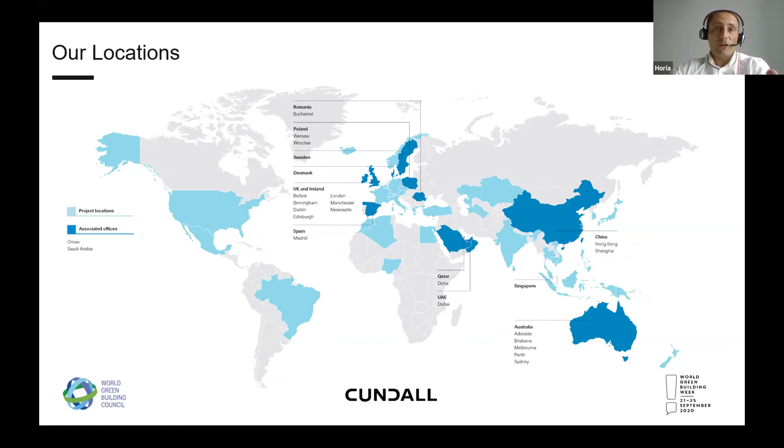We operate globally in 25 offices, so it all depends on where we are present. Some markets are more mature than others in terms of net zero carbon, and people are more educated in that respect. Now, net zero carbon for new buildings is the easiest thing to do, but we really need to be concentrating our efforts on reducing the carbon footprint of the existing buildings, which is at this point probably 90% of the stock of our clients. How we drive them to net zero carbon is a real challenge for developers and occupiers as well.

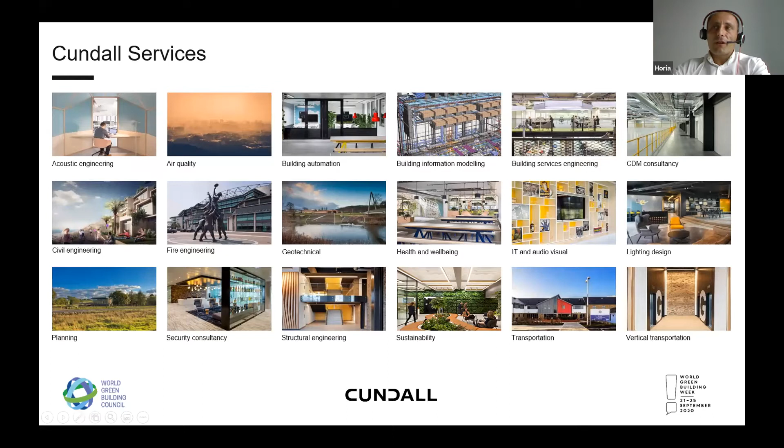As I was mentioning before, the key problem is the building stock of our clients, which will be the main focus right now. How can we get the best of what we already have? In our opinion, it's better to repurpose those buildings instead of knocking them down and building something from scratch. So the emphasis now is how to drive the existing buildings to a net zero carbon stage. My colleague Simon will touch on this issue a bit later in the presentation.

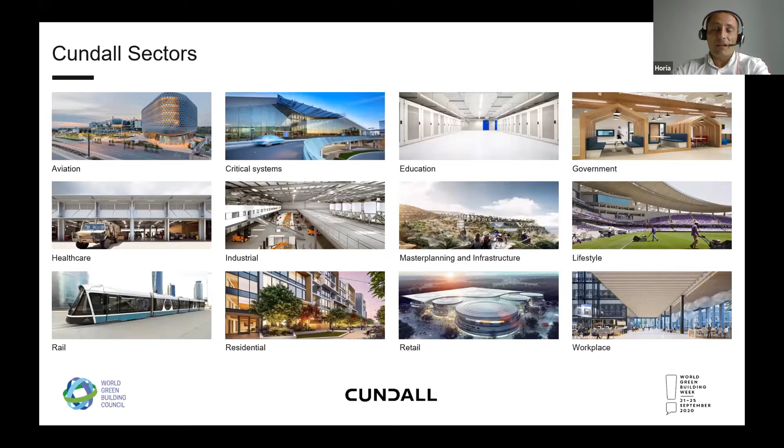Climate emergency. Climate emergency requires action across all sectors, and we are increasingly finding opportunities to reduce the carbon footprint in all our sectors. There are more and more clients that are pushing for net zero carbon now across the globe.

As a global community, we currently consume 1.7 planets worth of resources to sustain our daily demands. Earth Overshoot Day is the day we stop using our fair share of resources and we are starting to borrow from the next generations. This year, for the first time, this day actually moved in the right direction, but this was mainly due to the pandemic and because the entire world stopped for a few months in April or May.

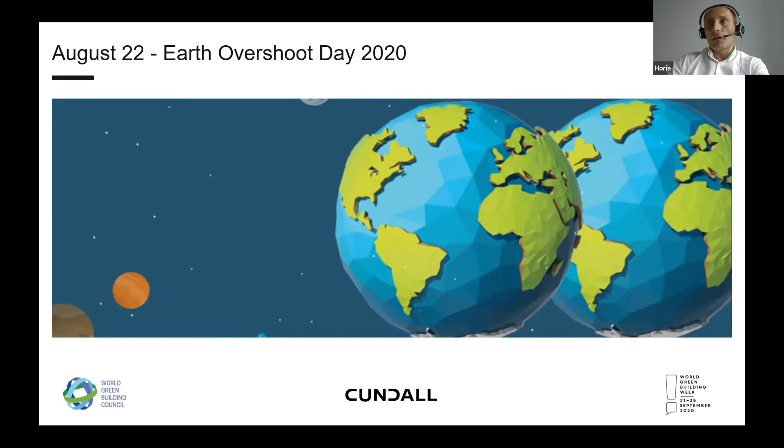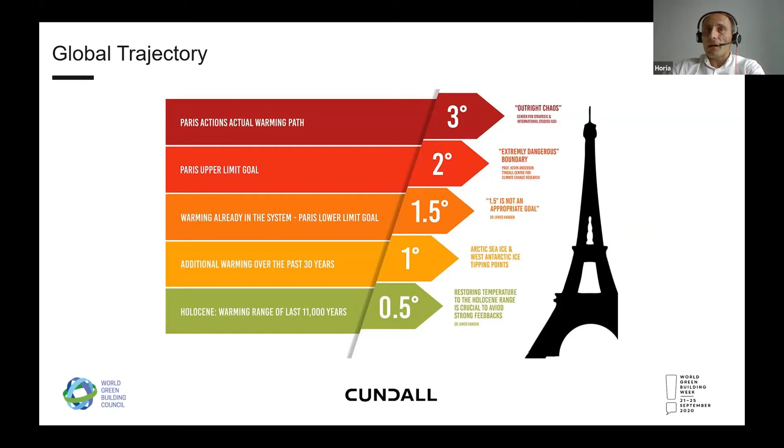Key to this is reporting and reducing our carbon emissions to help reduce our impact on global climate change. Just as a reminder, we are already on a trajectory of at least 3 degrees global temperature rise, which will have profound impacts on us all, and it's well above the target set in the Paris Agreement, which was 1.5 degrees. It is vital that we act now and we act together to achieve this goal of flattening the emissions curve.

Achieving the net zero carbon target must be at the heart of our industry and a response to this crisis. As you've seen, I think it's in the past 5 or 6 years that these things have started to happen. The impact of climate change is affecting us all. There are bushfires and the wildfires in California, in Australia. We've seen huge floods in the UK, I think it was in February this year. So we need to act as quick as we can, and we need to act together.

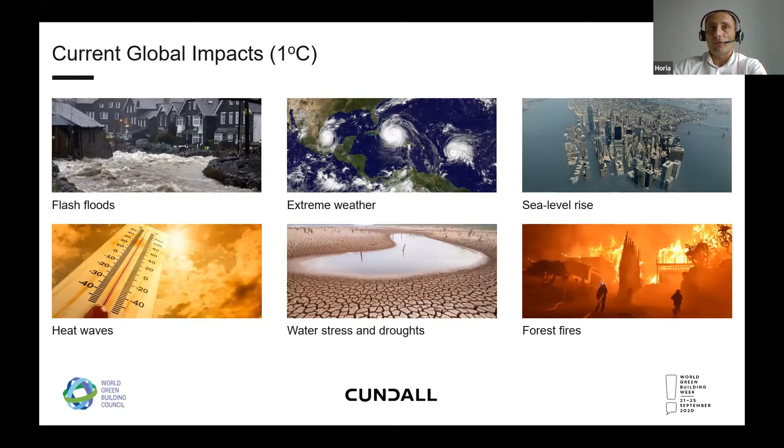In response to this, the EU Parliament have declared a climate emergency and set a target to limit global temperatures to 1.5 degrees in line with the low threshold of the Paris Agreement. To achieve this, they have set challenging targets to reduce carbon emissions by 55% by 2030 and to be a carbon neutral continent by 2050.

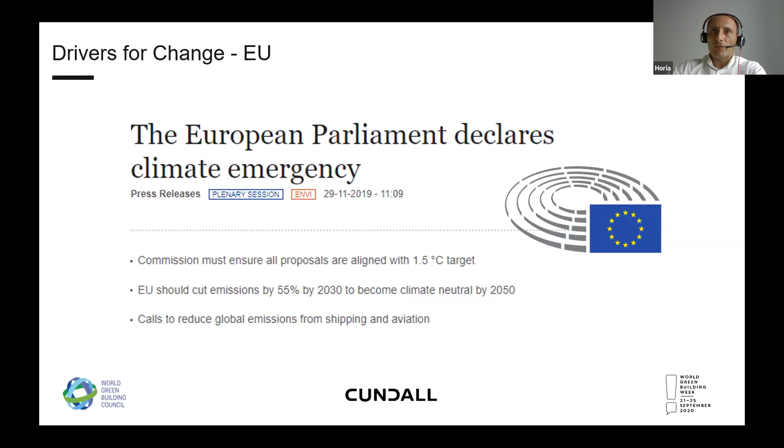Also, the Romanian Parliament in November last year declared a climate change emergency, but they haven't set the scene yet on how we're going to do this in Romania. We're still waiting for measures to be out there so we can implement them in our design and in our lives in general.

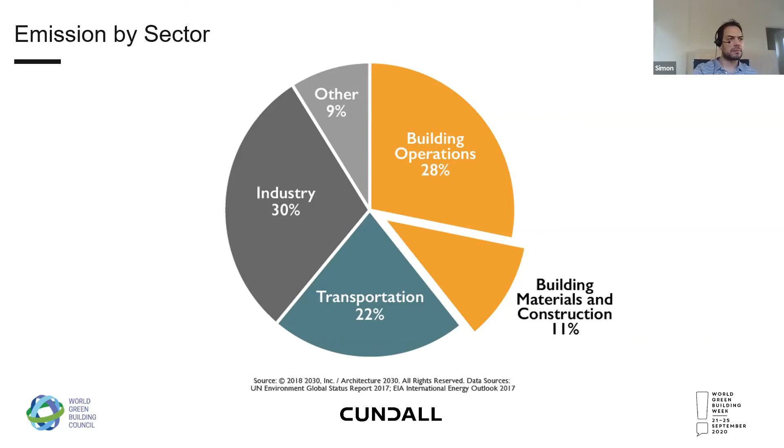To help this, the World Green Building Council, working with all of the local green building councils, have set some challenging targets around buildings. They've set a target that all new buildings are net zero carbon in operation by 2030, all existing buildings by 2050, and all new buildings by 2050 considering whole life carbon, so that's including the embodied carbon associated with their construction. To help people understand what this means, they've helped publish a number of documents which support this. We helped put a number of those together, explaining what upfront embodied carbon is, how to move towards a net zero carbon economy, and how to design these types of buildings.

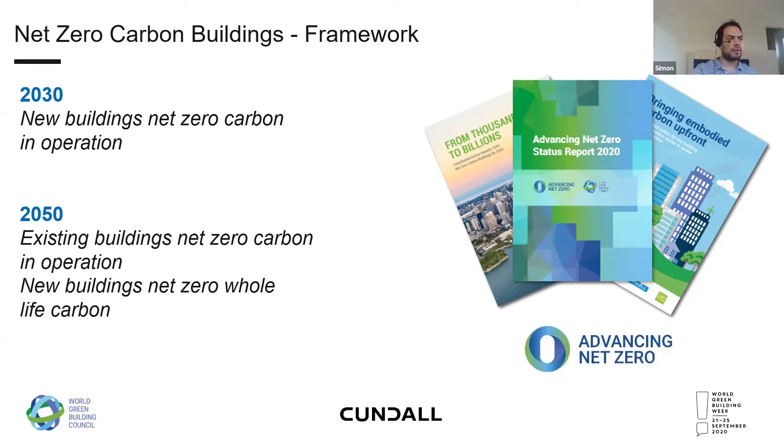One of the most advanced GBCs is the UK GBC, who have put together a framework for what net zero carbon in the built environment actually looks like, and that is now being adopted by a number of other green building councils around the world. And this is it here, which is basically saying that in order to be a net zero carbon building, you need to reduce your construction impact, reduce your operational energy use, provide renewables on site where possible, and if not, purchase green electricity. And then finally, once you've got as low a carbon building as possible, offset any remaining carbon using grade A certified carbon offsets.

The final part of the process is public disclosure, so that the process is transparent, so that people can see what other people are doing and make sure that there isn't greenwashing and people aren't just offsetting energy intensive buildings. This framework applies both to new buildings in design and also buildings in operation. And what's really important with this is the first two, which is reducing construction impact and the operational energy.

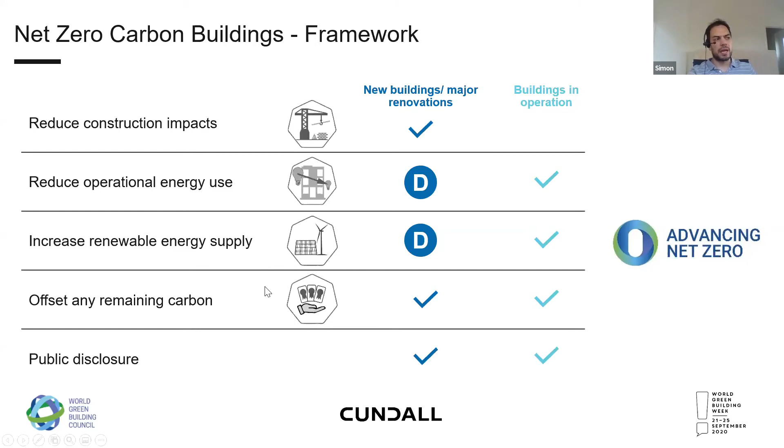And what is happening around the world is people are actually setting intensity targets. So these are minimum performance requirements for the construction, kilograms of CO2, and the operational energy, kilowatt hours per meter squared usage, before a building is allowed to do the renewables and carbon offset if they want to claim to be net zero carbon. So the question is, how do you set an operational energy target?

Well, the way it's being done around the world at the moment by green building councils is using a method called the Paris Proof. And that's basically saying, how do we transition to a net zero carbon economy? And when you have a net zero carbon economy, it basically means that all your energy demands are going to be met by renewable sources and there's zero carbon emissions.

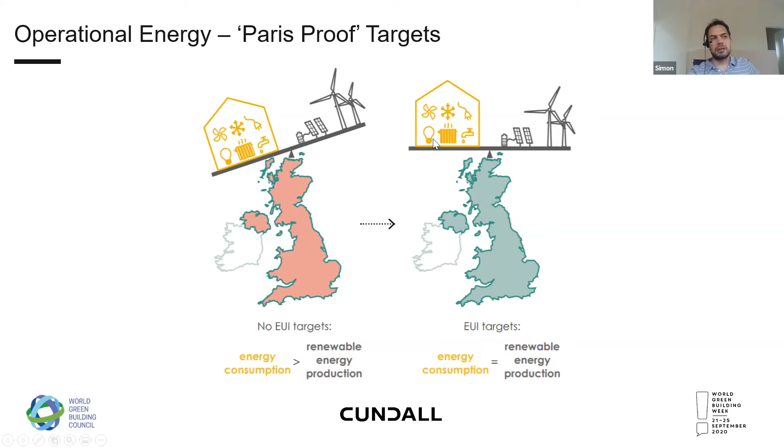If we take the UK, for example, at the moment we produce about 20% of our electricity from renewables, and therefore we have a huge imbalance compared to our demand. In order to move to a net zero carbon economy, we must reduce the energy consumption that we need, whilst providing more from renewables until they reach a balance.

So if we took a snapshot of that at the moment, currently this is electrical generation from renewables, which is about 20% in the UK, and here's demand, which is very high. In order to transition to a net zero carbon economy, we must reduce this demand while simultaneously increasing renewables. And once the two meet, then we move to a net zero carbon economy in terms of energy.

What that means for the industry is that basically, if all industries decarbonise at the same rate, it's about a 50 to 60% reduction in energy demand in all sectors. Obviously, all sectors won't be able to reduce at the same rate, and as we move towards more electric vehicles, that will put increasing demand on the electrical infrastructure.

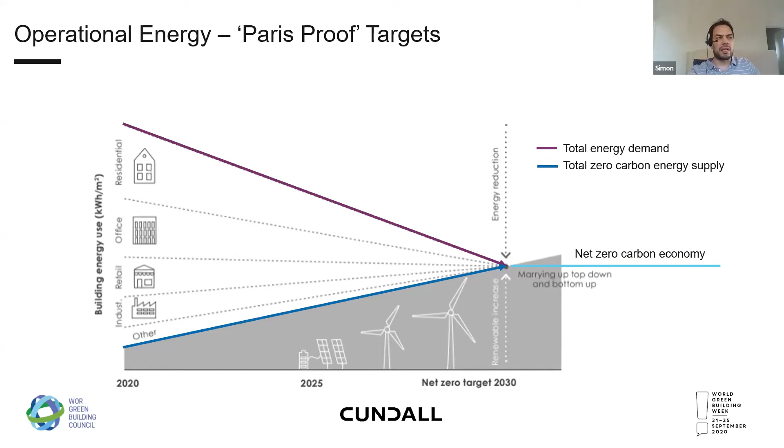So buildings, in order to meet a net zero carbon intensity target, really have to get kind of a 60 to 70% reduction from what is typical now. So if you take a typical average performing building in Romania and want to make it net zero carbon, the first thing to do is reduce energy consumption by 60% as a minimum. That is known as a top-down approach, which is basically saying what is every building's fair share.

And once they apply all of the energy efficiency measures, the lowest they're predicting we can get to for commercial offices is around 55 kilowatt hours per meter squared. So you can see it's a significant reduction from where current building stocks are at the moment, and is really challenging. And this is very closely aligned with the top-down approach, which is that 60–70% reduction.

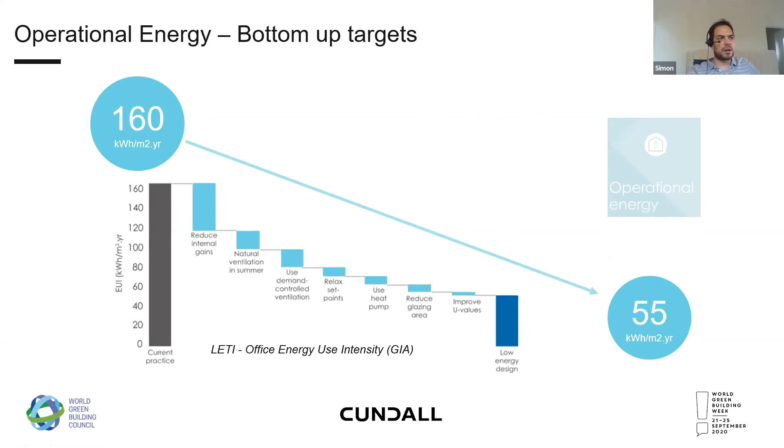So once we have operational energy intensity targets, the next focus will be on embodied carbon. So this graph is basically showing operational energy in dark blue, and at the moment it's the majority of a building's emissions. But as we reduce the operational energy over time, the embodied carbon associated with its construction becomes more important, and we need to start focusing there.

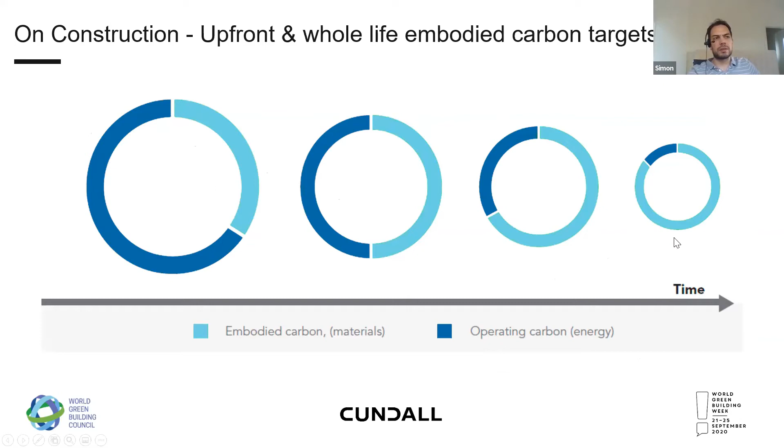When we talk about embodied carbon, what do we actually mean? Well, there's actually lots of stages of embodied carbon, and the main two are known as upfront embodied carbon and then in-use embodied carbon. So upfront embodied carbon is the energy associated with the extraction of materials, the processing, and their transportation to site, including the site activities, so all the cranes, plant that help produce the building.

When the building is built and completed, that is the entirety of the upfront embodied carbon, and that can actually accurately be calculated and reported on that completion process. Once the building is in use, the in-use phase kicks in, and that includes things like maintenance, repair, fit out, recladding, or any works done to the building during its 50, 60, 100-year life.

And then we also have to account for the end of the life. So when the building is demolished, what happens to the materials? Are they sent to landfill? Are they reprocessed for recycling? Or can they be reused, helping a circular economy? So all of that is whole life carbon, and has to be accounted for when considering the design of the building.

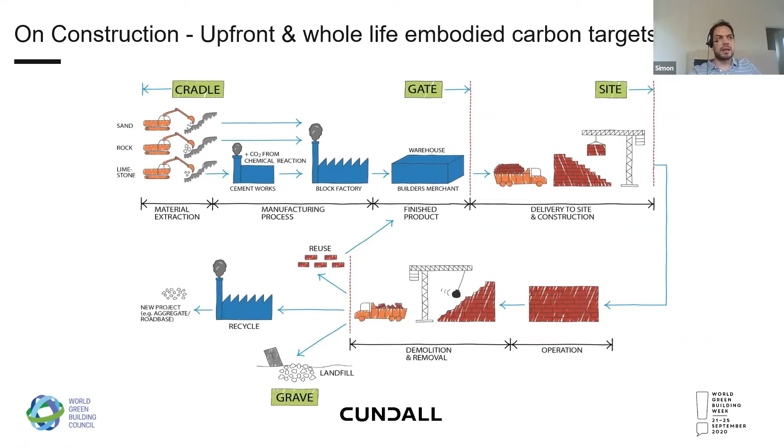Similarly to operational energy intensities, the entire world is looking at embodied carbon intensities. Cundall recently worked with the Greater London Authority to help them set their methodology and targets for new buildings in London. And we did a review of about 50 buildings which had recently been built, and they were averaging an embodied carbon intensity of just over 1,000 kilograms of CO2 per meter squared.

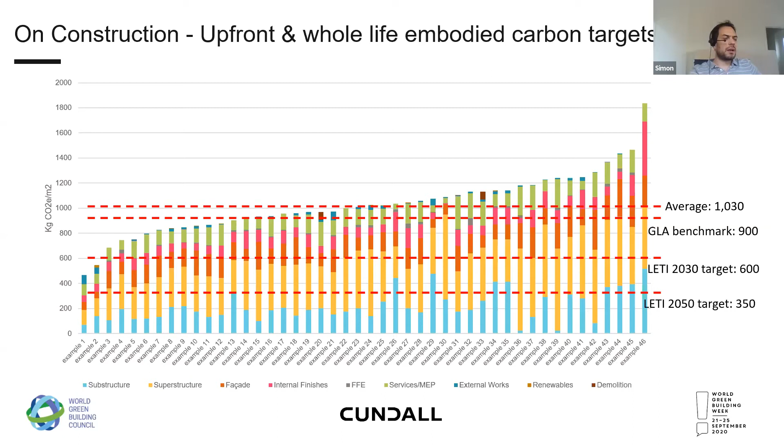Again, what you'll see around the world over the last 6 months is people setting these intensity targets. And what a lot of people have done is, instead of just jumping straight to an end target, they've kind of done a stepped approach. So setting targets for 2020, 2025, 2030 for new buildings, and then existing buildings at 2050.

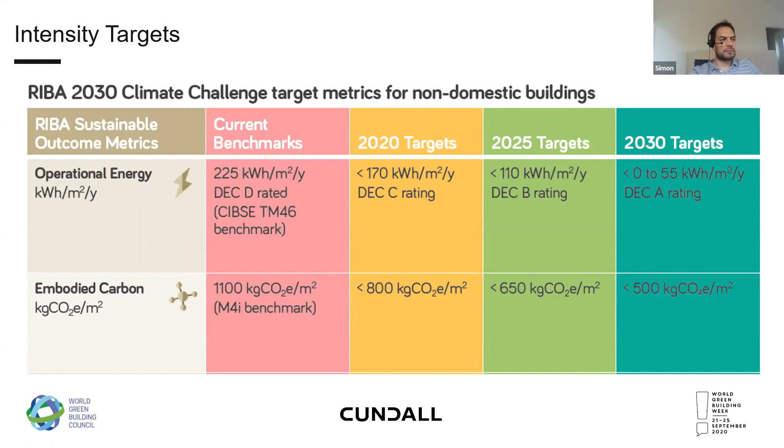Around the world, we've seen significant action and different frameworks and methodologies from different green building councils. And what Cundall have done is we've taken all the best practice and merged it into what we call our steps to net zero carbon. And I'll take you through those now, which is basically a process which you follow in a linear order to reduce the carbon impact of a building. This can be equally applied to new buildings and existing buildings.

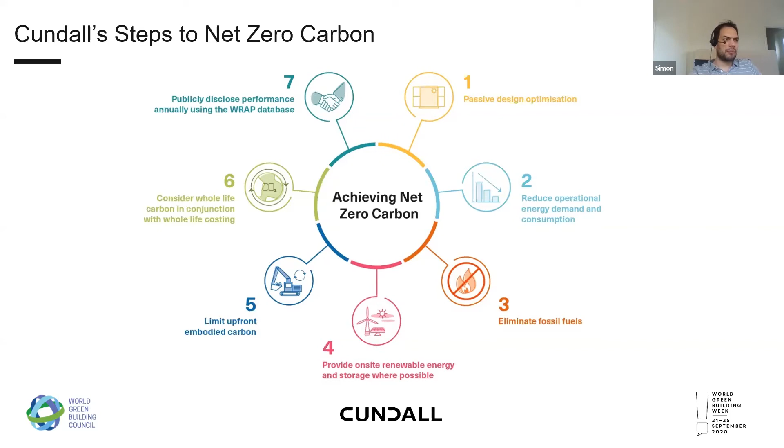So step one is passive design optimization. And what do we mean by passive design optimization? This is basically taking a fabric first approach to reducing the energy consumption of the building. So it's a low energy building before we even start putting systems in. And where do we start with this? We start with optimizing the facade. The facade is really important to a building.

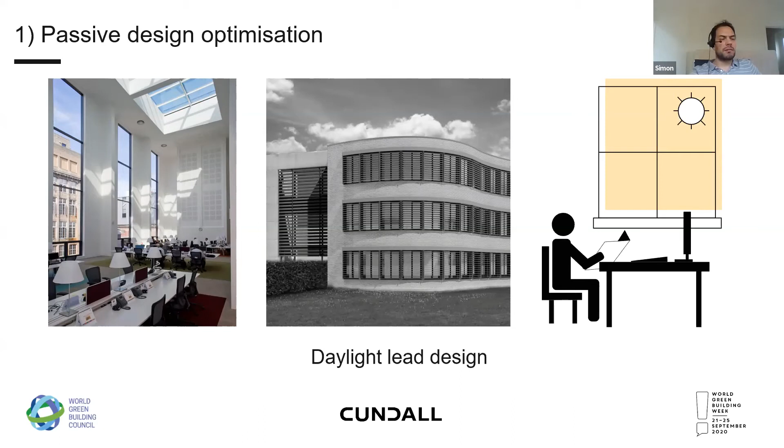We need to make sure that we are achieving good connection with outside for people's health and well-being and getting good daylighting. And when we talk about good daylighting, we don't mean wall-to-wall glazing, because that gives us glare, heat gain. Blinds are down for significant portions of the year, so we don't actually get the views out that we want. We want targeted glazing, which gives the views and enables people to have the blinds up for long periods of the time. So for most buildings that are aspiring towards net zero carbon, they generally look at around about 40 to 50% external glazing on the facade.

Once we've reduced the glazing, it means we've reduced the heat gains, which means we can potentially naturally ventilate buildings for longer periods of the time. Most buildings in cities have been sealed and don't have openable windows, which means that they are fairly energy intensive during the day. And even when they're not in operation and you have people coming in at weekends or at evenings, they have to run all the mechanical systems in order to keep those few people comfortable. By opening windows, we're able to provide comfort in those extended periods.

But what we really want to move towards is more buildings which are naturally ventilated or mixed mode. So a mixed mode building will be mechanically ventilated with heat recovery in winter, and then mechanically ventilated with comfort cooling in summer when it's really hot outside. But for the majority of the year, 60–70% of the time, it runs on natural ventilation, where it has openable windows, ideally cross ventilation or stack ventilation, driving fresh air through the building without the need for mechanical systems.

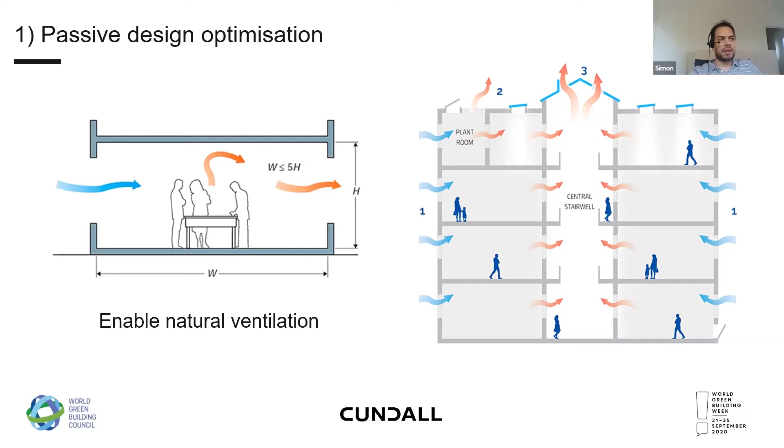The main focus of passive design optimization is really looking at the fabric of the building. So focusing on insulation levels, making sure we have continuous insulation around the buildings, looking at glazing. So where we have heat-led buildings like schools or residential, we go to triple glazing. If we've got commercial buildings, it's normally okay just to keep with double glazing. But also looking at things like thermal bridging, making sure that we don't have lots of penetrations through the facade.

And what's really important and what's been driven heavily in the UK has been air pressure test results and air tightness of a building. The building regulations at the moment in the UK have a requirement to test and achieve an air pressure test of 10 meters cubed per hour per meter squared. But most buildings now in the UK are targeting 1 or 2. So that's an 80 or 90% reduction over the building regulations air tightness. And in order to achieve something called passive house, which is a really good standard out of Germany associated with energy efficiency, you have to be lower than 1, which is basically a fully sealed building, which means you don't have any leakage or wastage of energy.

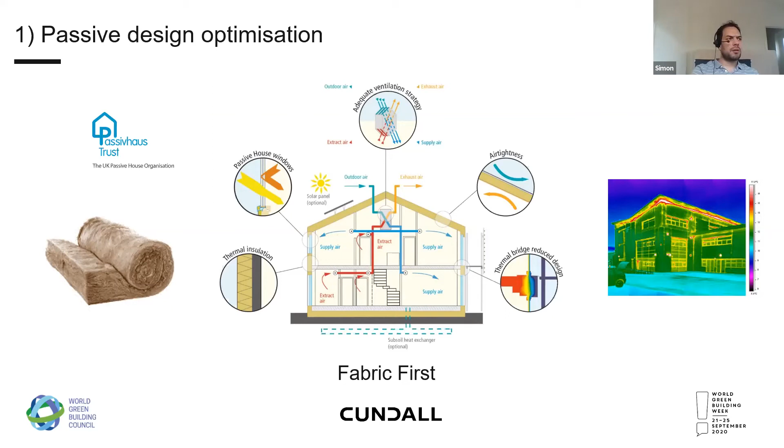Once we've reduced the energy consumption passively, we need to think about how we provide energy and reduce energy demands and consumptions. And one of the main ways we do that in buildings is looking at set points and how we heat and cool buildings. So typically, especially around the world, there's lots of buildings which will be heated and cooled to the same temperature. So they'll have heating to 22 degrees, cooling to 22 degrees, which means that a building can be simultaneously heating and cooling, which is very wasteful of energy.

By moving those temperature bands apart, we're able to save significant energy. So heating to 20, cooling to 24, means that we can actually achieve 10 to 20% energy savings.

Also looking at how we size equipment. So generally around the world, when we design buildings, we design them for the absolute worst case. We assume that they're fully occupied. We assume that everyone is using high amounts of ICT, and we've got the lighting on full even when it's sunny. What this does, it means that all the equipment that we install is oversized, and then when it operates, it's operating inefficiently at low bands.

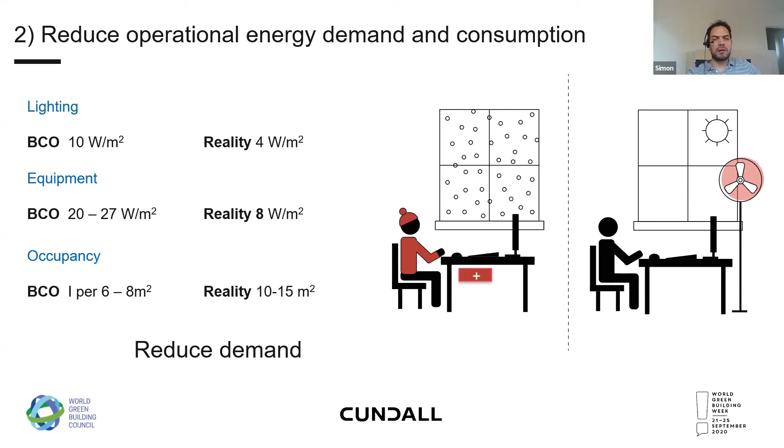So there is a move from Australia, the UK and America to reduce the size of plant and make sure that we're sizing things to work at the optimum performance for the entirety of the year, not just at that peak period.

To do this, one of the key focuses is around controls and using smart controls, so putting sensors into the systems, understanding how the buildings are working more effectively, and looking for areas where energy is used inefficiently. If you have a large portfolio of buildings, using algorithms and machine learning to review your buildings to optimize performance and highlight where things are out of range.

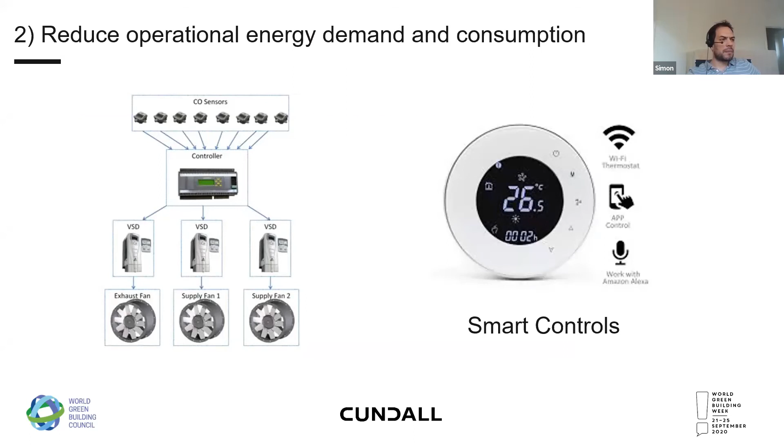Another major focus of the industry at the moment, in order to achieve the intensity targets, it's really important that we do detailed predictions and simulations during the design process. So there's a standard in Australia called NABERS, which has come over to the UK under a guise of design for performance, which is very similar to the American ASHRAE standard.

And what they require is you do detailed energy calculations at the early design stage to predict your actual energy consumption and optimize the performance of the system's facade and design. And then that is used to inform the design process, commissioning process, and control strategy. And what's really important with it is that you use that data to verify the performance in the first year. So you actually go in and fine tune the performance of the building and make sure you're achieving what you said you'd do.

Around the world, most countries do not actually look at the operational energy of the building once they've built it. They don't fine tune it. They don't go back after they hand over that building. It's really important we make sure that during the first couple of years of a building's life, that it is operating as we designed it to do so.

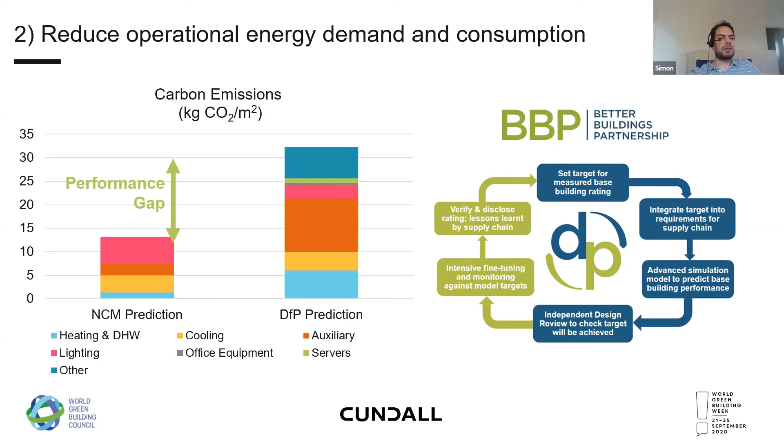With the move towards net zero carbon, one of the most important things we need to do is move away from fossil fuels. So globally, the main heating source generally is natural gas or diesel. And obviously, if we're burning fossil fuels on site, it's very difficult to claim to be net zero carbon. We need to start moving towards electrification or potentially the hydrogen economy.

What does this actually mean? Well, it means in most buildings moving towards heat pumps. Heat pumps are generally 300 or 400% efficient, so are much more efficient than direct electric heating. And also looking at district heating networks to provide low carbon heating to dense urban areas.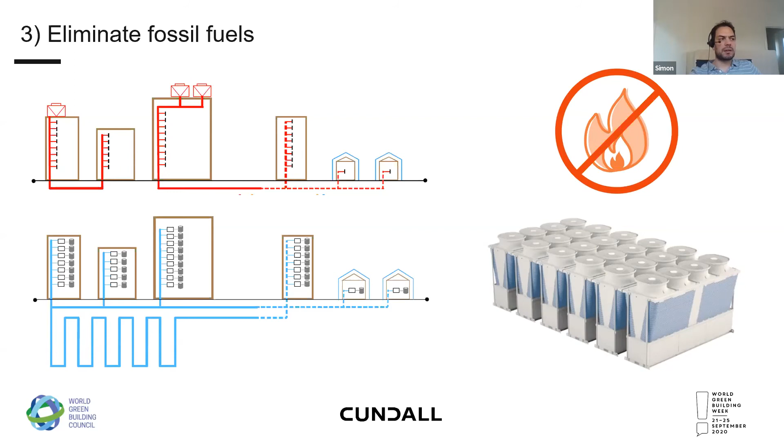Once we've reduced the energy consumption as much as possible, then we need to look to provide as much renewable on site as possible. Normally, this isn't possible for urban environments. You only have a limited roof area. So if we're out in the rural environments, we can potentially have enough PV on the roof to meet our demands, but most buildings will only be able to produce a percentage of electricity. And once we get large PV arrays, it's worth considering battery storage so that we can actually deal with the times where it's not sunny or we have high demand.

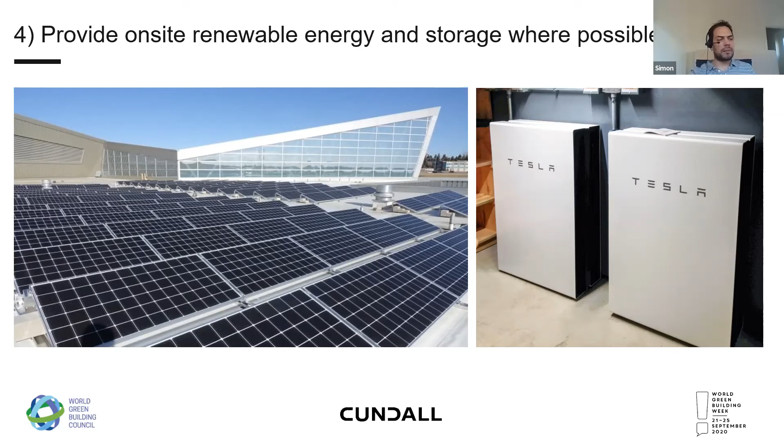Once we've looked at the operational energy, then the next thing to do, as I mentioned earlier, was look at the embodied carbon associated with the construction of the building. So the main focus should be on that upfront embodied carbon, so the actual materials we select and how we actually build the buildings themselves.

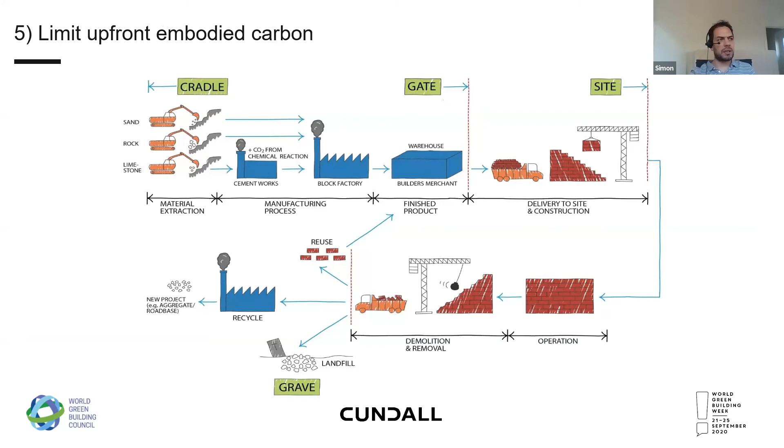So if you think about a typical building, you have the embodied carbon associated with the construction of the building, the foundations and the frame. So that's normally concrete or steel. You can use replacements for cement to reduce your concrete footprint. For steel, you can start specifying steel which has been produced from an arc furnace rather than a blast furnace, which uses renewable electricity and recycled steel instead of using

natural gas fired furnaces. Or what's being mooted a lot around the world at the moment is the use of CLT and timber. So that's considered to be extremely low carbon because it's absorbed carbon during its life and growing, and actually has a negative carbon footprint. So what you need to do is look at every element of the building and say, can we use different materials, or can we make the materials we're using more efficient, reduce the amount of materials we're using, and then calculate that impact to see how we actually perform against those intensity targets.

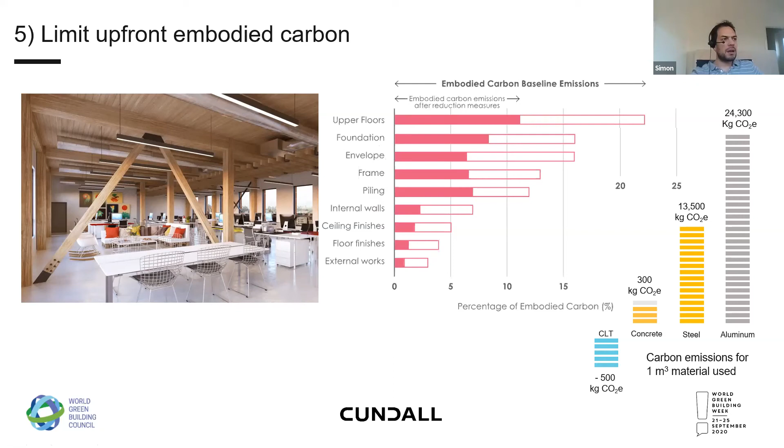When we consider carbon, we need to consider it across the whole life, as I said earlier. So one example is a facade. So if you've got a new building and you build a facade which is low embodied carbon but needs to be replaced every 20 years, it might be better to go for a more carbon intensive building to start with in the first place, but it might last for 50 to 100 years and therefore have a lower whole life carbon footprint.

In terms of carbon footprinting and calculations for the built environment, there are a number of methodologies which Cundall have produced. So there's the RICS guidance and RIBA guidance in the UK, which set out a methodology for calculating and reporting. Again, the GLA, which have produced a methodology and guidance for calculating, which has been adopted by different councils around the UK and being used internationally now. We've also worked with the Hong Kong construction industry to produce a freely downloadable tool which calculates embodied carbon. So again, there is lots of different activity in different regions, but they're all starting to align.

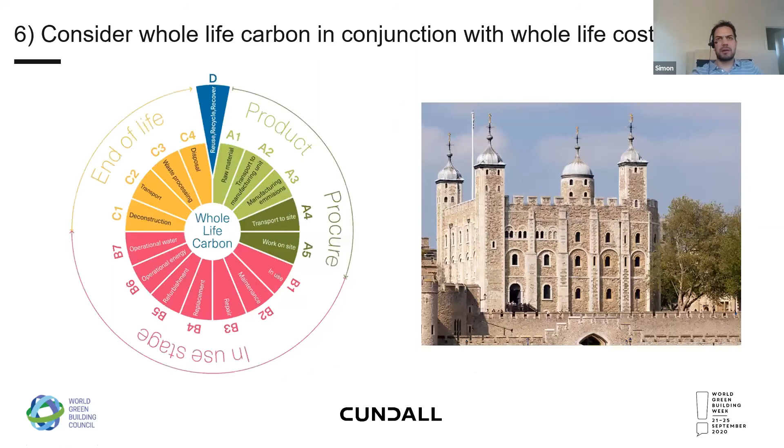And the final step, as I said, is public disclosure. We really need to be transparent in what we're doing so that people can see what everyone is doing, and also to make sure there isn't greenwashing and people claiming to be doing things that aren't giving the benefits they're actually saying they are. So what we want people to do is to start reporting their carbon footprinting.

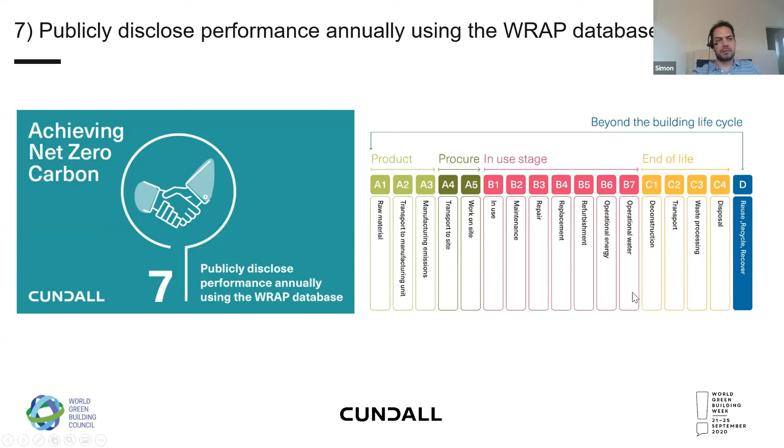So when you build a building, you report on completion your A1 to A5 emissions. So that's the upfront embodied carbon associated with the construction. Then on an annual basis, you report your B in-use carbon. So that's your in-use, maintenance, repair, operational energy on an annual basis, and then offset any carbon emissions. And then at the end of a life, if a building is disposed of or demolished, you report the C and D modules. So I'll just finish up with a few case studies.

So for new buildings, we've just finished in Australia a building called the Sustainable Buildings Research Centre for the University of Wollongong. It is classed as a net zero carbon building. It has been designed with passive design in mind. It uses natural ventilation for the majority of the year, although it does have heating and cooling. It takes advantage of thermal mass and the materials that have been selected are generally natural materials with low embodied carbon.

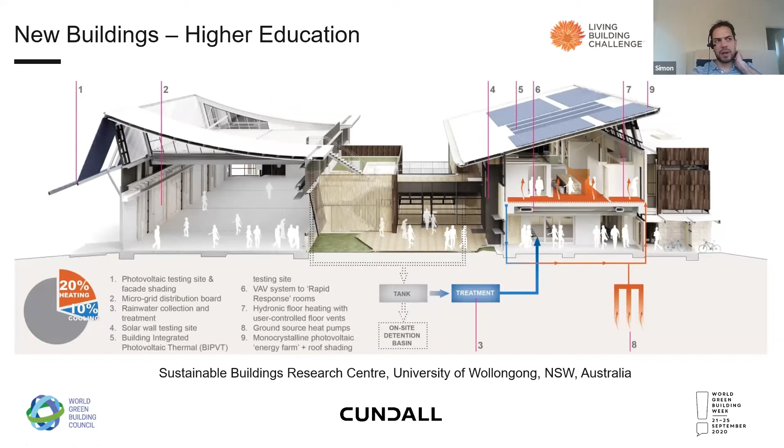In terms of heating and cooling, it's provided by ground source heat pumps, so there's no combustion on site, and then it has a fairly intensive PV around the roof, which actually produces more energy than it uses, generally about an extra 20 to 30% a year. And that actually is being used to offset the embodied carbon that was used to construct that building. So after, I think it's about 14 years, it's predicted to pay back its embodied carbon, so it will actually become a carbon neutral building in its entirety.

We're also working with retailers, so working with a major retailer in the UK, a supermarket, and we've been looking at their whole operation, including looking at the equipment they use in the stores. And we've set a pathway to net zero carbon for those stores. So we've done their typical design, then we've made optimizations on the performance and basically said how they can move towards net zero carbon, and given them 5 options that can be costed, and they can decide how far on the journey they want to go towards net zero carbon in order to meet their corporate social responsibility targets.

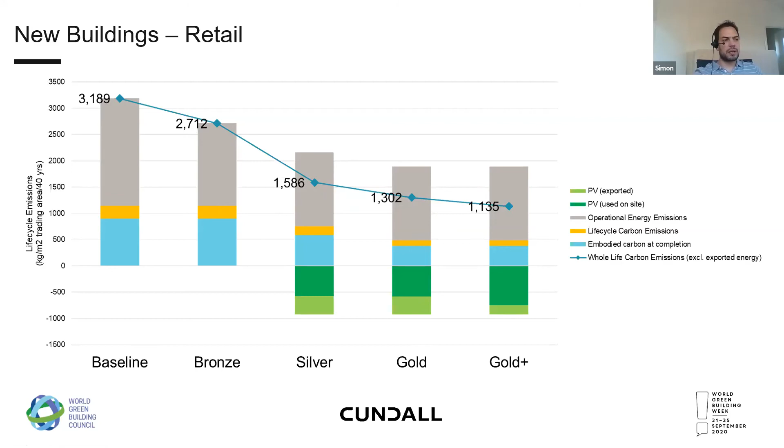One of the major problems that we face, as Horia outlined, is existing buildings. So the target is to be net zero carbon across the entire EU by 2050. But by 2050, we'll only have replaced about 20 to 30% of the building stock. So if we only focus on new buildings, we won't hit that target. What we will need to do is decarbonise all buildings.

So if you walk around any city or town, every single building you look at will need to move towards net zero carbon, which means significant work for a lot of existing buildings. And what we've been doing with a lot of our clients is going into those buildings and doing reviews, high-level desktop reviews to basically say, how can we move towards net zero carbon, but also detailed simulation and modelling to work out what the current performance is, and then how we can actually set a pathway down to the net zero carbon targets.

And that might mean going in and replacing the heating systems to heat pumps, upgrading the fabric to make it more airtight and add more insulation, looking at making the buildings naturally ventilated with mixed mode ventilation, as I mentioned earlier, and also looking at the behaviour change of the occupants. So it's a significant piece of work which is going to require significant effort globally in order to decarbonise the massive amount of buildings that we currently have.

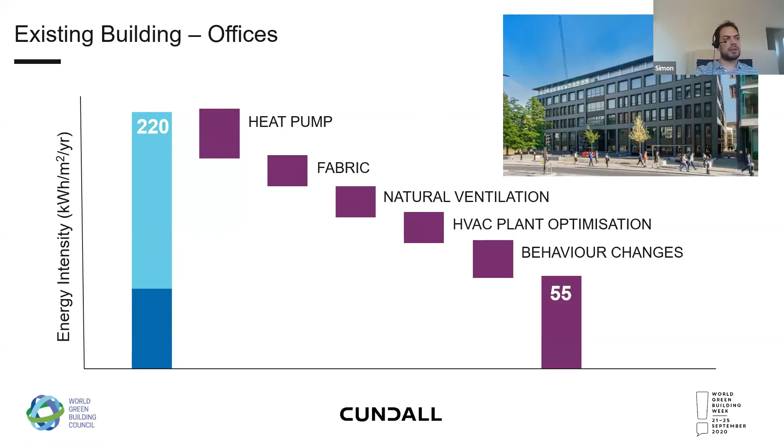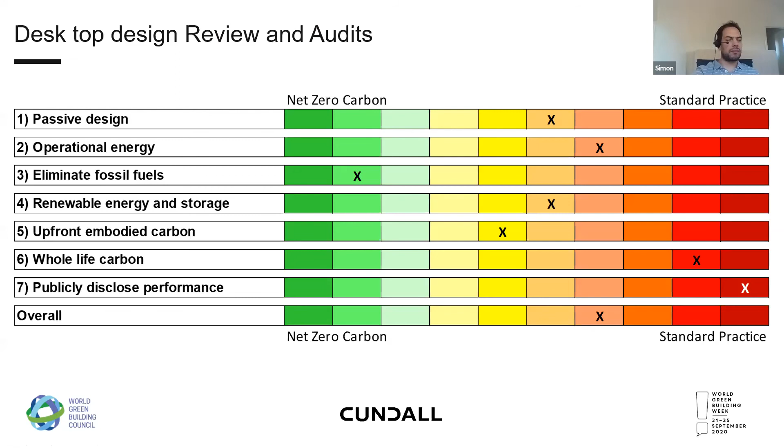And the way we do this is using our 7 steps. So again, going into a lot of buildings and just basically scoring it against passive design, operational energy, fossil fuel use, renewables, and basically saying how close is it to achieving net zero carbon, and then making a list of recommendations and interventions which can be done. Some of them are quick wins and easy to install, others require significant works and significant costs which need to be factored into the life cycle of that building.

So off the back of doing this over the last couple of years, Cundall have put together some bespoke services, and we're able to help now organisations decarbonise their buildings. So that's both new and existing buildings, looking at energy in use and also looking at the embodied carbon and whole life carbon. We also help large landlords and funds with portfolios or estates. So that's setting strategies across an entire portfolio of 10, 20, 100, 1,000 buildings.

And what's really important when we're looking at portfolio level is really understanding where to prioritise effort. It's not a case of just taking each building individually. It's looking at the data in its entirety and focusing our attention where we can get the greatest savings as quickly as possible. And we can also help at corporate level, so looking at carbon footprinting of organisations and carbon neutral certification. So as Horia indicated, we're just finalising our carbon neutral certification for Cundall, but we're working with at least a dozen organisations to help them achieve their own certification.

And I'll just finish up with a call to arms. So we've seen that climate change is really starting to affect the world. We're seeing emissions rise, we're seeing sea levels rise, we're seeing forest fires, flooding globally, and these things have started to have a huge financial and human cost. And if we don't act, they're going to become more frequent and the cost of them will mount up. So we really need to start to take action to reduce these effects of climate change going forward. So that's the end of the presentation.